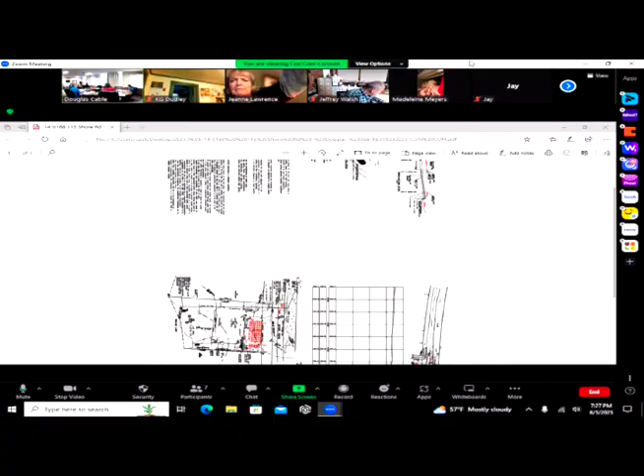Sure, not much changes. Basically, Jeff requested some additional information for the plan, which is the road profile itself, up to 4 or 5 houses left and right. We did that. We submitted the information to Jeff. He also asked me to see if my client can contact the Board of Health, Planning, Highway Department, see if they have any historical information for the road. They did, but they came out with nothing. All departments with no information. Okay.

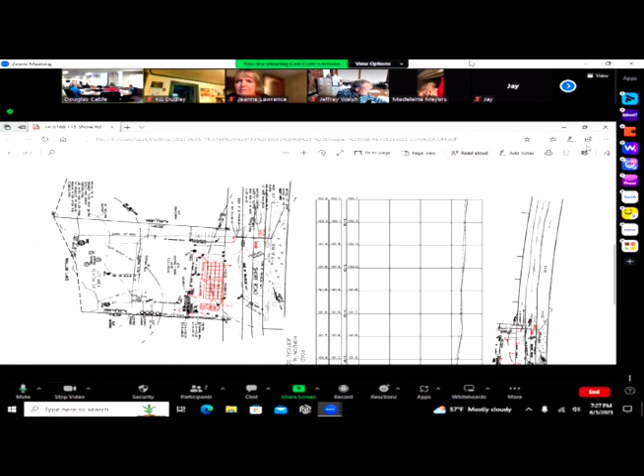We can't hear anything you're saying. Could you please speak up? We're right here in the room and we cannot hear you. Do you want to come up, Cliff? I have a seat right here. You can come next to me. There's one right there too, next to Mike.

Okay, Jeff, what do you have for an update for us? Are you satisfied with the road profile and the changes made to the plan? Jeff? He's muted. Sorry about that. Jeff Walsh with Graves Engineering, consultant to the Conservation Commission.

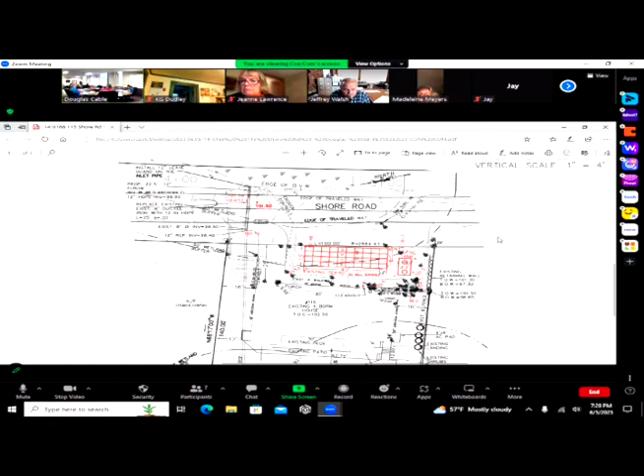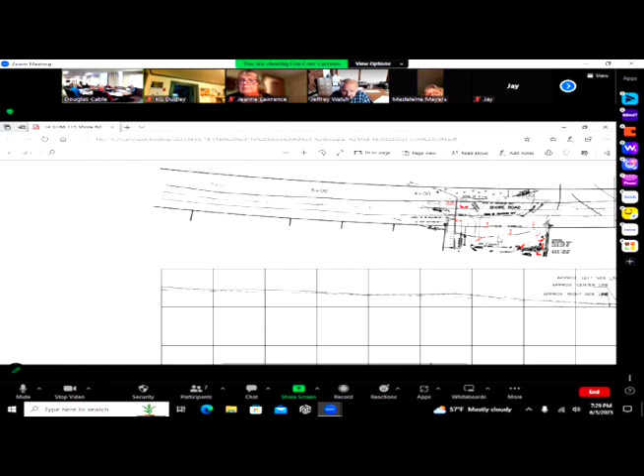Yes, Madam Chairman, I did review the profile plan that was on the screen a few moments ago, and I looked at the grading along the profile, and the profile does show a high spot in front of the northern driveway in front of number 115. On the profile view, it's about station 3+65. If you wouldn't mind moving the cursor down a little bit to the profile, and a little bit left, into the next square, right about there.

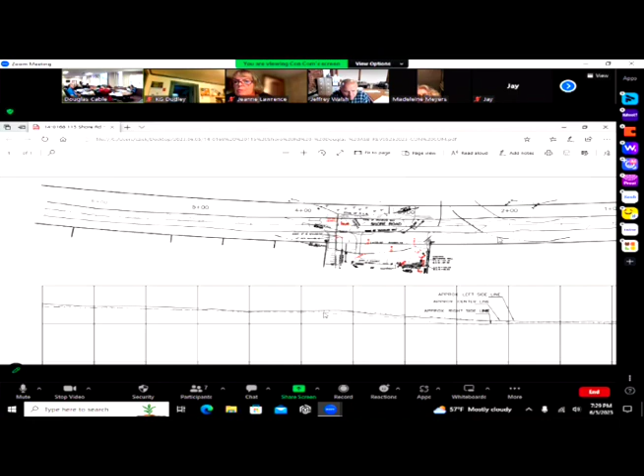That little high spot is in front of the northern driveway, and measuring it off this profile, it looks like it's about 0.4 of a foot higher than it should be, when I look at what this road probably had for a grade years ago, knowing that it used to be an old railroad bed. So that high spot needs to come down about 0.4 of a foot or so, and that is consistent with what the applicant's engineer proposed at the last meeting with their site plan, spot elevations and stormwater flow directions. So in short, the profile confirmed their proposed elevations.

And quite frankly, I'm not scratching my head anymore about whether or not the grading that was proposed to the commission in Shore Road was in order. To me, it appears to be in order based upon this larger profile view of Shore Road. Okay, very good.

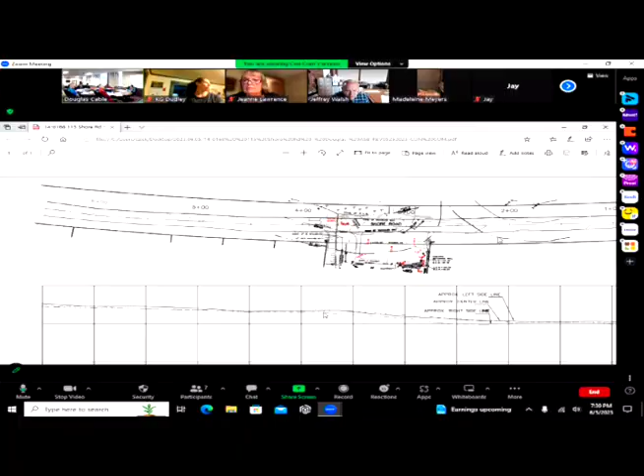So board, do you see the proposed grade is coming down? What would you say approximately? It's about 6 inches or more. Okay. In that short area, so 6 inches for how many square feet? That's all the way into our property until the whole grade will go down just on the right. Okay. Okay.

Katie Grace, any questions? No, thank you. Okay, do we think that maintenance annually is enough? I think that unless there is an emergency event, like another flood that we saw that dove us into this entire conversation, like we had that 4th of July weekend, or if there's some other incident, that annual maintenance would be sufficient. Yeah, so, or before a storm event?

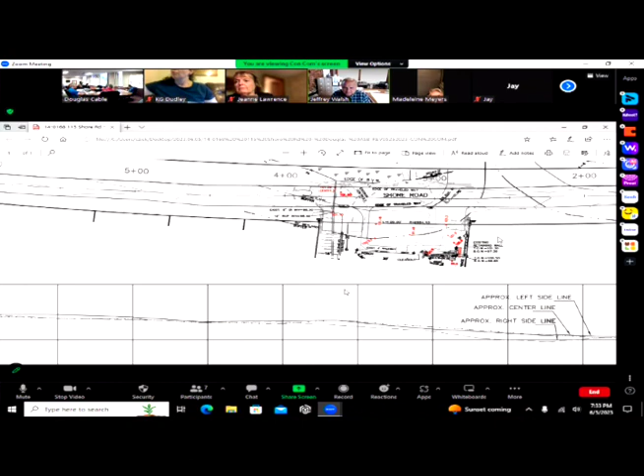Jeff, you good with that? Yes, I'm good with that, Madam Chairman. Okay. All right, board, what's your pleasure? Would I be making a motion to approve this proposal? And to issue an order of conditions, right? No? Oh, we don't have one for this? Okay. And it's tricky because is this part of 115 Shore Road? We are, yeah. Is there a deed, okay.

Okay. The number 5's continued. Old business number 7, public hearing continued. Notice of intent, Legacy Circle, map 166, lot 15, site access drive, Peter Michael Business Park. Madam Chair, could you move that item down? We're waiting for a member of our team. Would that be possible? The next item is continued also. Oh, okay, we're up. All right.

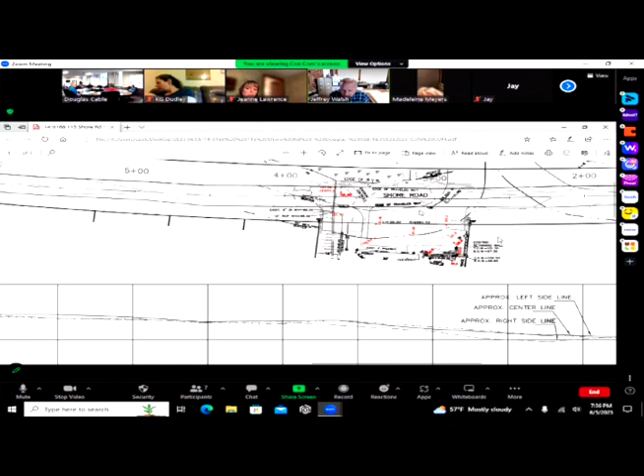Who is our consultant? Was our consultant Steve? Jeff's still here? Oh, Jeff, I'm still here. Okay, thank you. So I don't think you gave a formal response yet to the last comments response memo? No, I did not. The staff member working with me did get a follow-up review underway. The draft of that review letter ended up on my desk the other day. It looks like things are in order, but I haven't put my eyes on it and finalized the review or issued the letter yet. But I had positive feedback by way of the draft letter that was written.

I exchanged emails with Steve Zisk late today, but again, I haven't put my eyes on anything, Madam Chairman. But it's my understanding the culvert was widened from 12 feet to 14 feet. There were additional check dams put in the swales. Those check dams were the pre-treatment, if you will. That was my primary concern in the first review.

So it was the culvert size and the pretreatment? The culvert size, I was okay with. It seemed to be cutting it very, very close, but they followed standard procedure as I understand it. And even though the stream channel didn't have two parallel lines, I understood that the commission had asked them to widen it, and I understand that the plans show it widened, but again, I haven't put my eyes on that plan yet.

Okay, can you pull up the plan online? You've got to remember, there's some people viewing it online. If I could, Madam Chair. Mike Dryden, Senior Project Manager, Allen Engineering. I know he hasn't had a chance to look at it, but if you look at our letter, we did exactly what he asked us to do on each and every item, so we don't take exception to anything that Mr. Walsh had. I may have called him Mr. Graves, sorry, Jeff. That's all right, Mr. Dryden.